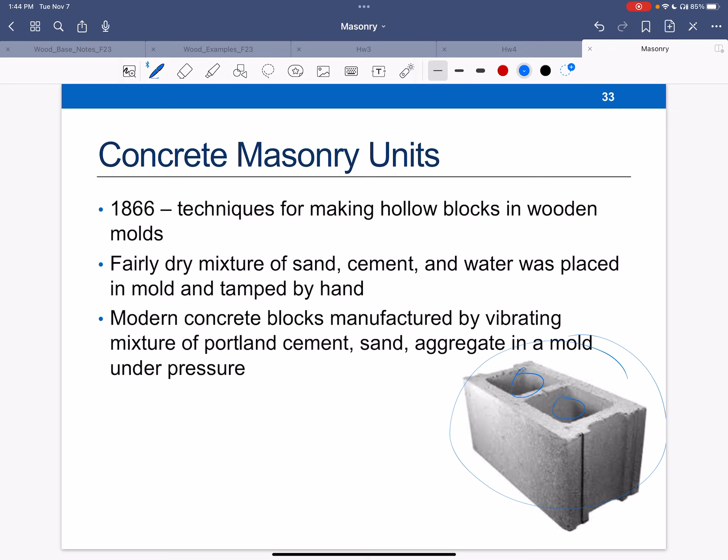If you go look at these, you can see that it's got kind of almost like a Rice Krispie look to it. You can tell it's a real dry mix with not a lot of paste. So go take a look at one up close next time you're at Home Depot or Menards, or if you're in one of the dorms, you probably have seen plenty of those.

Okay, so concrete brick is ASTM C55. That's the specific, or the testing standard, just like for concrete, we'd have C150, things like this, okay? Or cement.

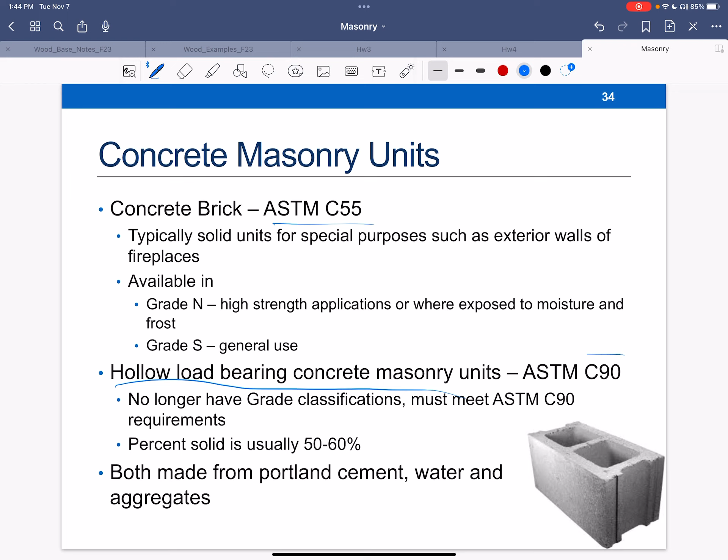Typically, these are going to be solid units for exterior walls, things like fireplaces for concrete brick. We're not going to worry about this right now as much. What we're more interested in are the hollow CMU units. They have to meet ASTM C90. They're usually only about half void and half solid. Portland cement, water, and aggregates. There may be some admixtures, etc. in there.

All right, so like we've been doing with wood and what I talked about with brick, there's nominal dimensions and actual dimensions. So nominally, we'd call this an 8-inch wide, 16-inch long, and 8-inch tall standard CMU unit. These are actual dimensions. You've got a mortar band, so that if I wanted to count up the blocks, I would be able to use the nominal dimensions and not have to attribute the mortar piece.

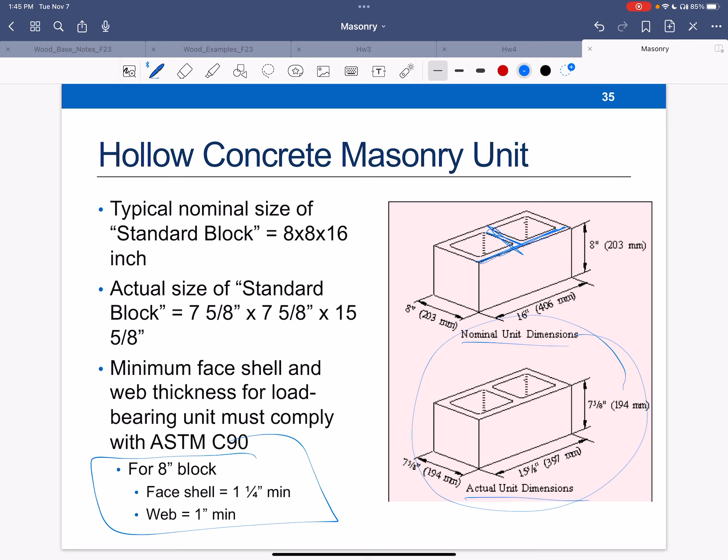There's a certain, for an 8-inch block like this, there's a certain minimum face width for the shell and a certain minimum for the web. So 1 1/4 on the outside, 1 inch in the web, which is that middle piece.

So here's some examples, a bunch of different examples of types of CMU units. The one I showed on the previous page is the one you see the most. You'll also see the 3-core model out there. These other ones are kind of specific to different applications.

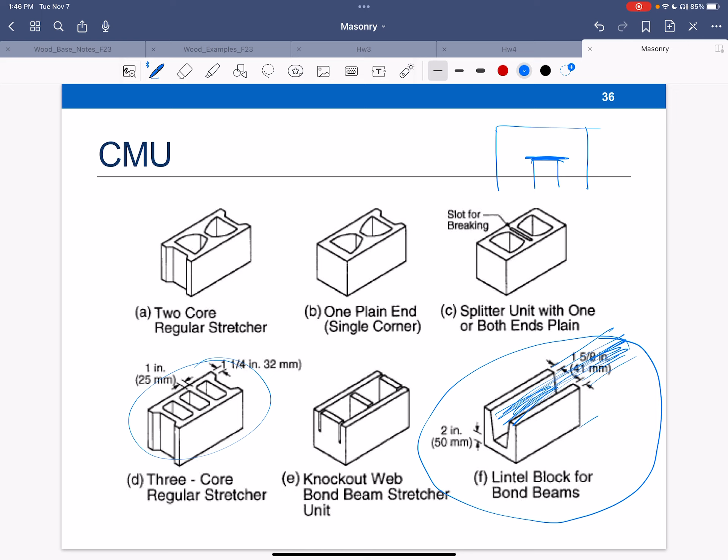One that we'll see here that you may not be as familiar with is a lintel block for bond beams. In other words, where I'm going to use this is at the very top of the wall, or if I need a lintel. So let's say I have a wall and I've got a door opening here. I need a lintel or a beam, bond beam, and I can put this type of block and then fill it, and if I put a bunch of them together, you can see I get a continuous fill in here of concrete or mortar and reinforcement. So when I want to turn this into more of a beam unit, this keeps it continuous.

Here's some more of these guys, different variations. There's pilasters that can be used as well. So basically, if you're looking at a concrete masonry block that has some type of hollow shape, you're looking at a CMU.

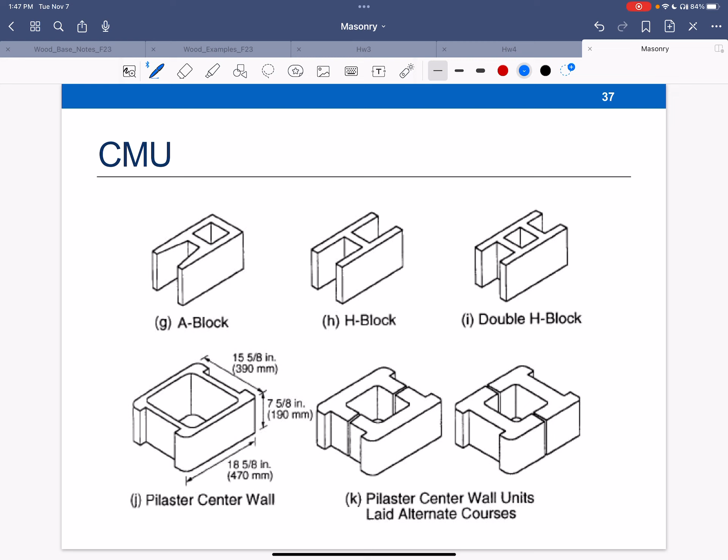Okay, so an important part of this is mortar and grout. The mortar allows us to take up some of the irregularities between block or brick. It seals between them, right? So it kind of allows for full bearing, right? So that I don't have bearing just on the tips of some irregularities, but it also seals them, sticks them together, and it looks nicer if we do it well.

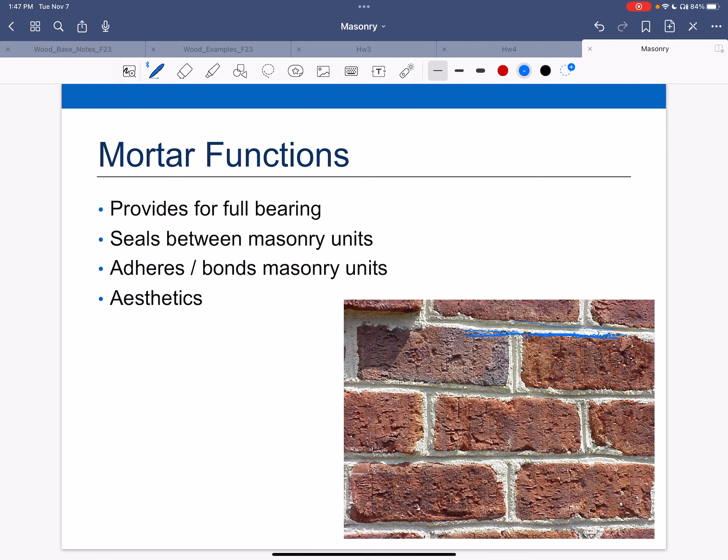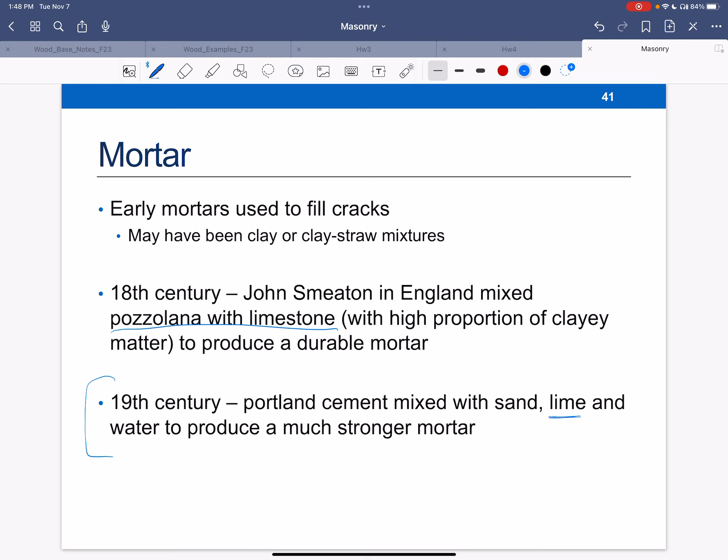So early on, mortar was made of clay or maybe a clay straw mixture to fill cracks. And then it became more of a limestone reaction, right? Or a cementitious type reaction. And by the 19th century, we were using Portland cement, sand, lime, and water. And we started to have a much stronger mortar, bordering more on a mortar like we'd have today. Ours are even higher strength at this point because we don't want the mortar to be the weak link in this process. So it's important that we have a strong mortar.

You guys have access to the ASTMs through our library, through the Compass website. So while you're in school, here's a good time to take a look at some of those without having to buy them. That's a great way to do it. I believe you can actually download them if there's some you want to use.

Similarly, we've got exterior use, interior load bearing, and then non-load bearing, basically architectural type walls. We have to have a more robust mortar if we're outside for durability purposes.

Admixtures, you can have admixtures in the mortar. You can have it quick set, slow set, more flowable, things like that.

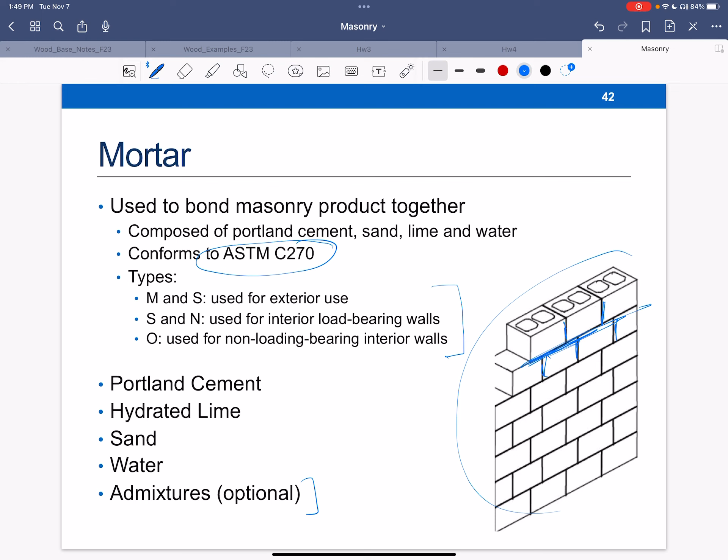Typically the mortar is prepackaged, just like the mortar grout you put between your tiles in the bathroom or kitchen. Prepackaged, you can get it in different colors. It has to follow the testing and specifications I mentioned earlier. It does need to cure. It's a cementitious type product, and it does have a shelf life. In other words, it's not going to behave the way you want after a certain amount of time. So very similar to concrete or the ready mixed bags you can get at the home store.

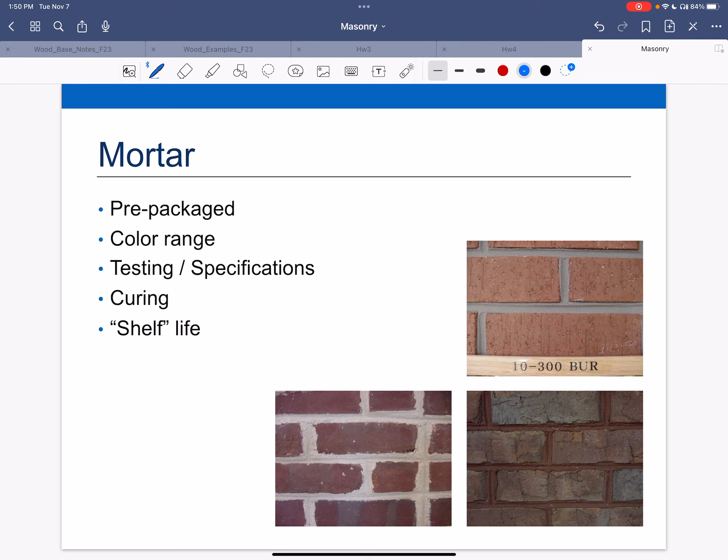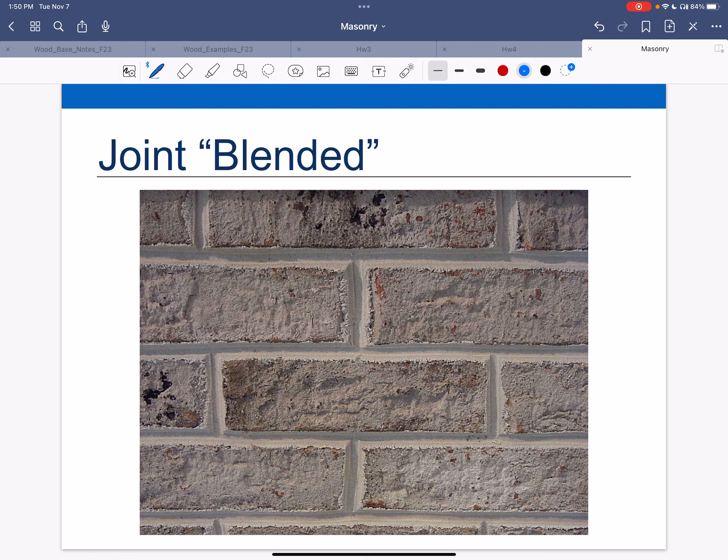You can see some that match the brick, some that are contrast to the brick, etc. So here's the blend. This is the joint coming out and blending, sort of. Color contrast. This looks very much like a veneer, to be honest. Very thin, smooth brick.

And a couple others. Now, grout is similar to mortar, but this is what we use to fill the hollow parts in our CMU, and I may have reinforcement in there as well. Grout is also what I study for post-tension structures. It's the same type of mixture, it's just got different properties because I'm looking at fluidity and pumping through some really tight spaces in a post-tensioning tendon, whereas this is to fill these hollow cavities.

They'd be vertical in this case, or in those bond beams I showed you, or lintels, they would be a horizontal fill. There is usually sand in it. Grout is essentially cement and water and may have some fine-grained or coarse-grained materials in it as well. These have to conform to C476. So the mortar versus the grout have different conformance standards from ASTM, and that's what you would follow based on the application we're using here.

There's nothing in the code about low lift or high lift grouting, but you'll hear it used. If I've got just 5'4" or less, they typically call that a low lift. High lift would be if I wait until I'm all the way up to something like 24 feet before I grout. So I can grout in stages as I go out. The higher you go, it becomes a little more complicated with filling that space and making sure you have it consolidated.

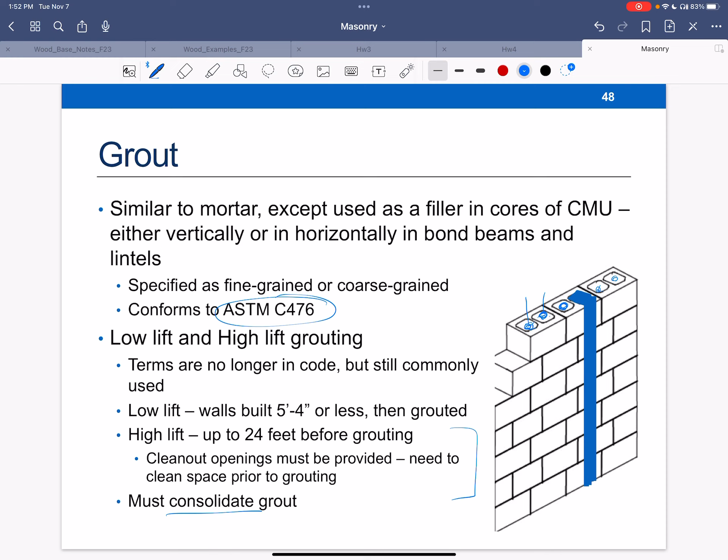Okay, so that grout really ties all this together, and when there's reinforcement in there, it's also forming part of this final wall system, to where you can start to see it looks very much like a reinforced concrete wall.

Okay, let's talk about masonry joints. You may just think of it as they put the stuff between the bricks, but, as a structural engineer, it's not huge that you know this, but it's interesting, much like all the species of hardwood and things we covered in that section.

So here's some names of all the different ones. You're going to see flushed or standard concave. You can have it way concaved or recessed. Make a V, all different types of things. And it takes a different tool if you're making the V versus some of the others.

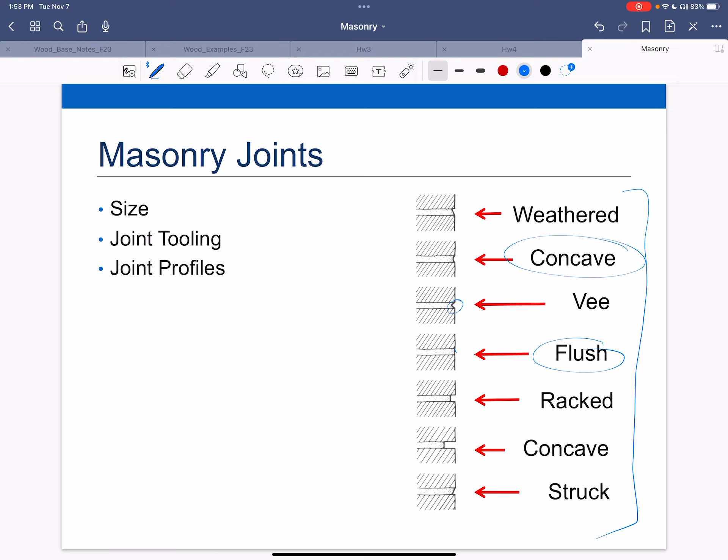Okay, so here's some bricklayers going ahead, and you can see they have some different types of bricks here. Laying this. This is a trade that is time consuming, and it's really an art to be a good bricklayer.

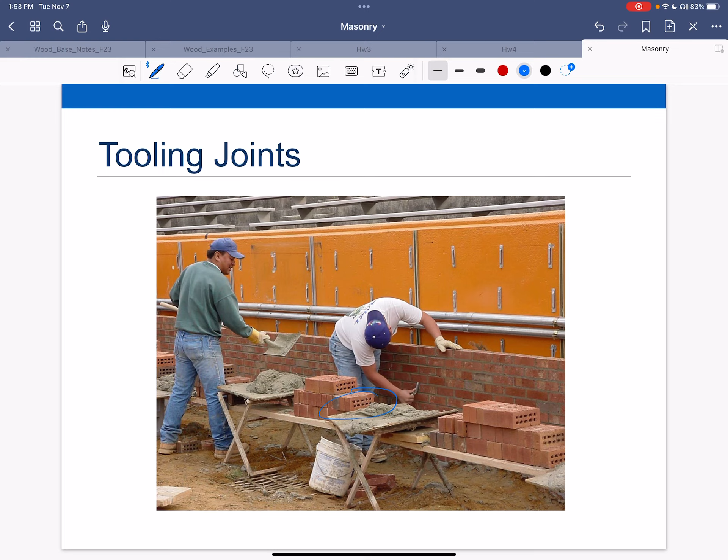Here's what I typically see the most are these concave type joints. When you run the tool through here, you get a nice, smooth, rounded type joint.

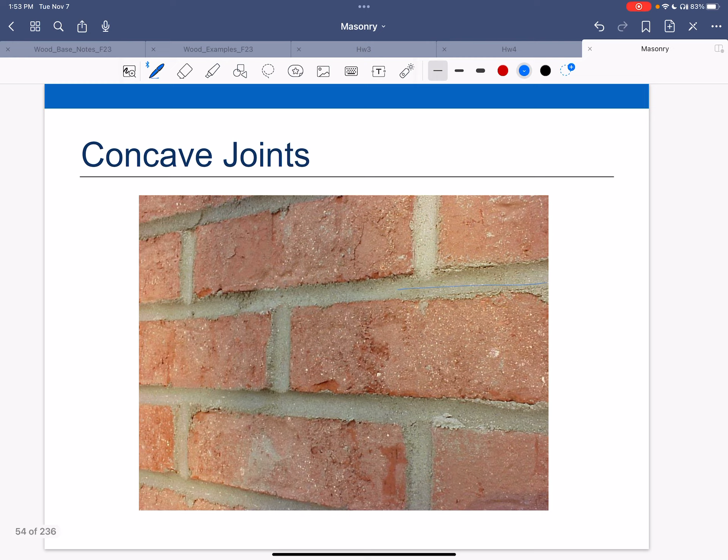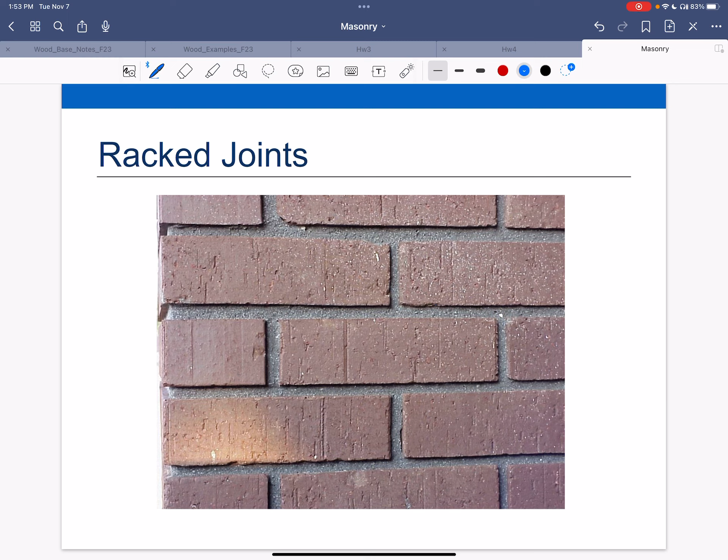Here's one that they've had the V tool. These joints are completely recessed back. A little bit more of an operation here. This would be more common, I think, with veneers.

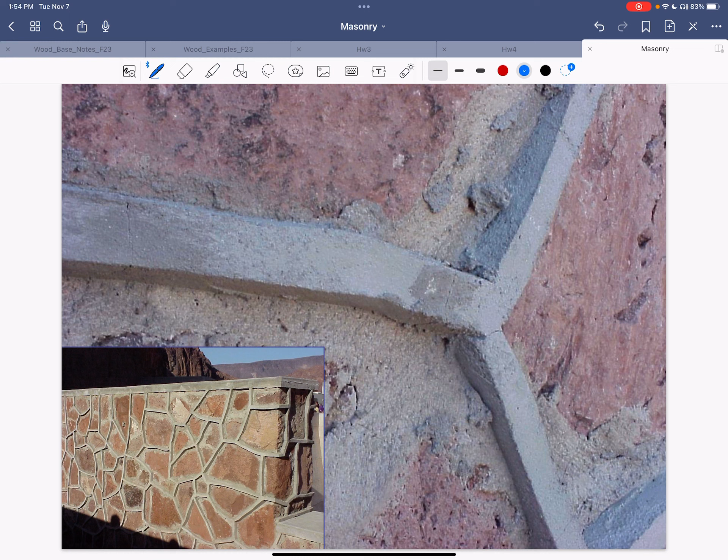Okay, here's a more unusual one where the brick or the stone is actually recessed and the joint sticks out. Interesting architecturally, easy to chip that stuff off because it's basically unreinforced mortar.